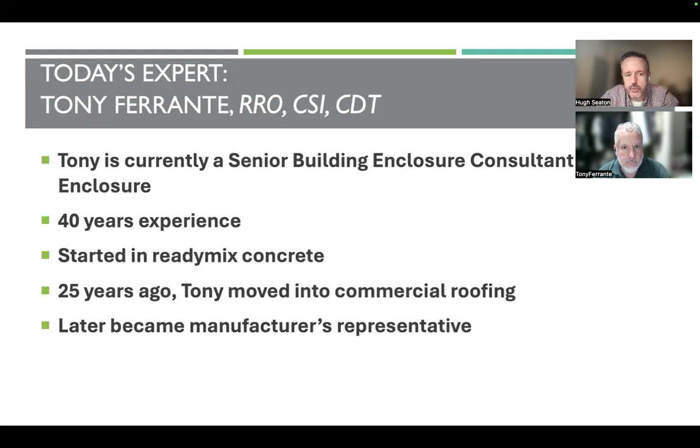So I'm going to go through just a little bit of intro. Tony's today's expert. I met him when he was presenting some of this material at the CSI national conference. He's senior building enclosure consultant at a company called BPL Enclosure. He's been at this 40 years, actually started in the concrete world. 25 years ago, he came into commercial roofing, so really understands what goes into the enclosure, and has been a manufacturer's rep and so on.

He's with BPL Enclosure, a national team of building science experts. Lots and lots of experience in providing this sort of thing, whether it's third-party peer reviews with designers, QA work with contractors and owners, looking over constructability and various other issues, but also can be the prime and architect of record when you're redoing or renovating something, when, of course, a lot of times enclosure was one of the leading reasons for it, which is kind of why we're even talking.

This is one of the dirty little secrets of construction, but it's not as well known as it should be: water damage is something like 70% of the lawsuits in construction. And over 90% of those failures occur from just 1% of the enclosure. So the point being, the details matter.

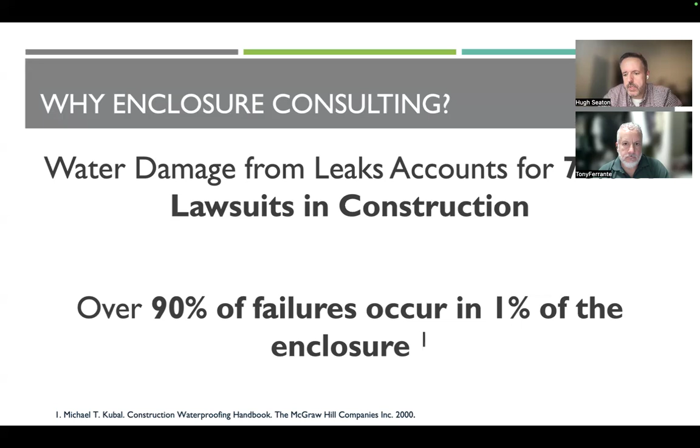As important as design and upfront work are, of course they are, the details really matter. Often, as we're going to see, sometimes that's catching something that an unrelated sub did when they were finishing something, or maybe they punctured the vapor barrier, all these other things we'll see in a minute. But the point is, it's often not something big and glaring that winds up over time really causing an issue.

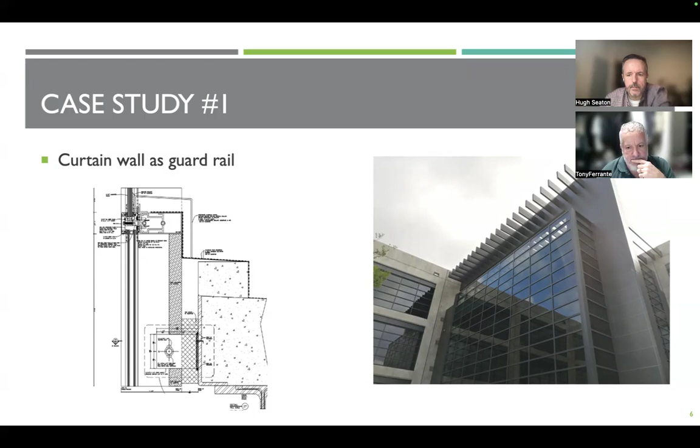On the next slide, you'll see that the original construction was watertight when it was put in - we water tested it and it worked great. But then we started getting called. We got a call from the owner that water was coming into the spaces beneath this plaza. So we went out there, and lo and behold, when we had tested it, it was when the water barrier had been installed and after it was tested and proved to be watertight.

A contractor came in and decided that the way they were going to dress this up was they threw this mismatched bronze piece of coping, for lack of a better term, on it. And they were so unprofessional - you can see where they hand snipped this thing to get it around the supports, then used clear silicone caulk that they probably bought off the shelf at Walmart to try to make that watertight. So one of the best maxims you can use in construction is: if it looks wrong, chances are it is wrong. Nobody should look at that detail and say, oh, that looks good.

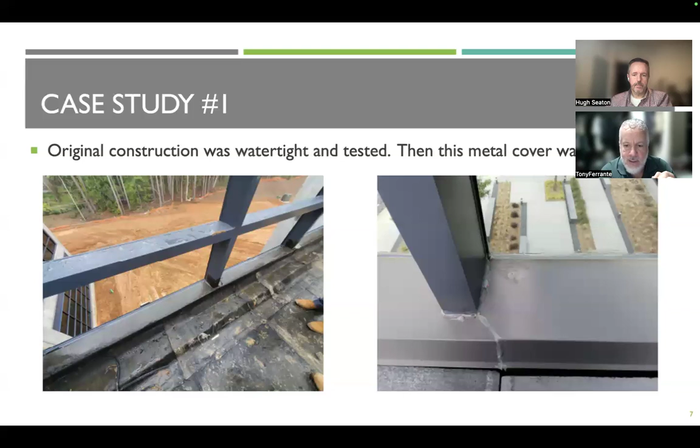So when you go to the next slide, we came in to try to figure out and do reverse engineering and forensics on it. The person who was asked to dress this up actually threw a wood nailer on top of the ledge that was totally superfluous and wasn't needed. And in installing this unneeded wood nailer, they punched holes through all the waterproofing. Then they put a T-bar into the existing waterproofing, putting holes in that as well. And then they attached that gross piece of coping on it.

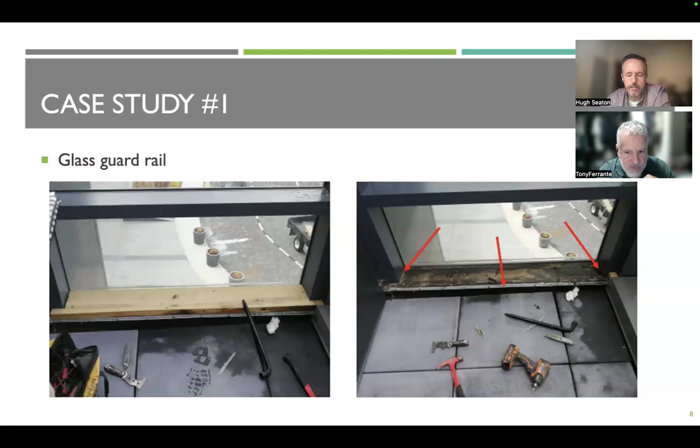So we had to have them come in - a different contractor. They removed the T-bar, they removed the wood nailer, they reinstalled a true waterproofing, water resistant layer on that. And the finished product should be on the next slide. We then covered it with more waterproofing, and the final product was a coping cap that went over that base flashing.

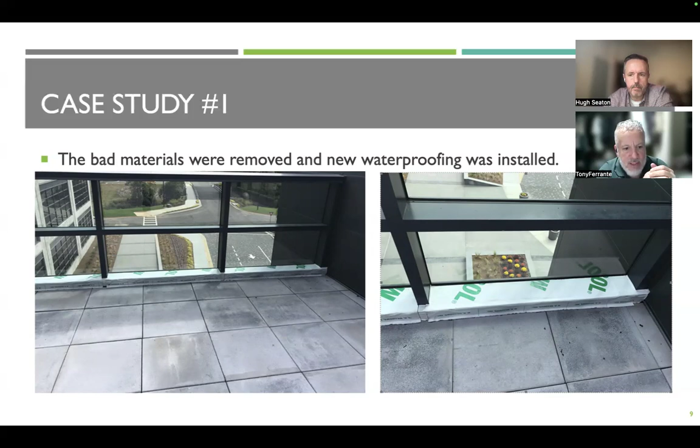And they matched it - first of all, they matched the same color of bronze. It's not hand snipped, it's not sealed with caulk, but the important thing is there were no intrusions, no penetrations through the waterproofing. It's very frustrating for the building owner because it had gotten this seal of approval that when the waterproofing was installed, it was in fact waterproof. And then a separate trade came along and totally destroyed what was there.

That's kind of the point we're trying to make today - a lot of times the original design and the original installation and build is fine. But either at the end of the job or later as things get adjusted, it's important for everyone involved, whether it's the GC or the owner, to really understand: is the subcontractor who you brought in aware of issues like this? Are they qualified when it comes to waterproofing and enclosure? And a lot of times they're not. So it's very important to have kickoff meetings, a lot of communication between the trades, people working in the same area of the building. They should have a ready flow of communication so they can understand what each other does.

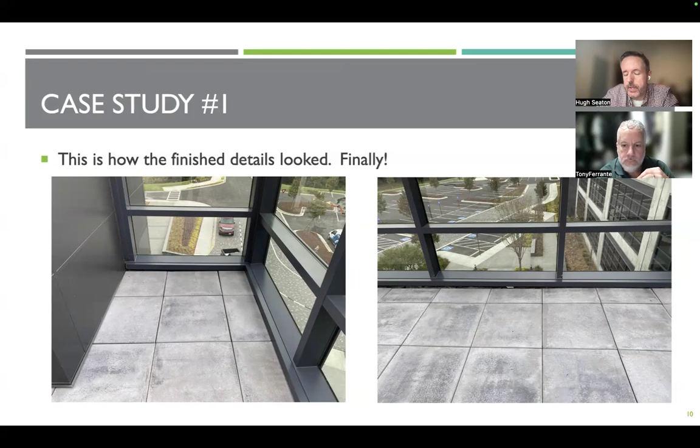Case study number two is the problem you get with exterior entrance doors. The majority of exterior entrance doors, if they're for egress, can't be made 100% watertight. Back in the first class we talked about the 4 Ds of waterproofing or rainwater management, and the number one is deflection. So it's very important if you've got exterior entrance doors that you deflect the water.

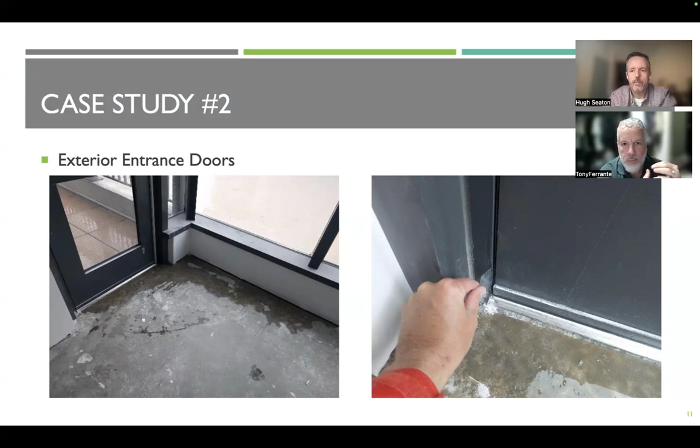You have a canopy over it, or in some way keep the water from hitting the door or pooling in front of it. On this particular building, the next slide shows the door we were looking at. There's a canopy above it, but it's so much higher above the door that it's really not providing any deflection for that door.

So they were getting wind-driven rain against that door. Water was pooling at the base of the door, and there was no way to give it a full weather seal. That's when you have to drop back and punt and say, okay, we've got a situation where they didn't want to add a lower canopy over that door. They couldn't — they were stuck with what they had.

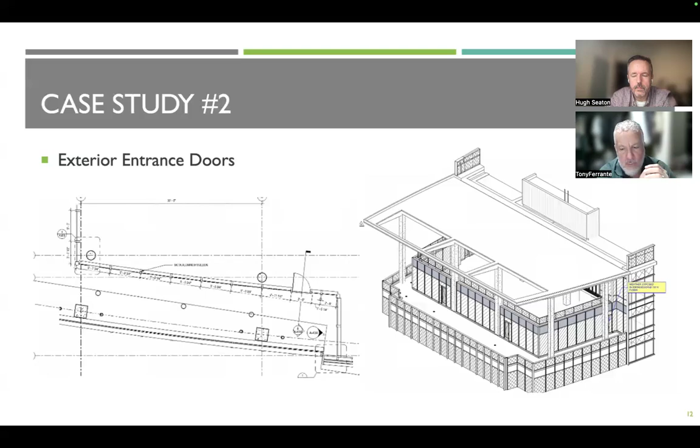The next slide shows the only acceptable remedy was the slab. There was a slab depression with a drain and a walk-off grate, so that the water that was understood to continue coming in could be handled without redefining the entire building and violating codes with an interior or exterior egress door.

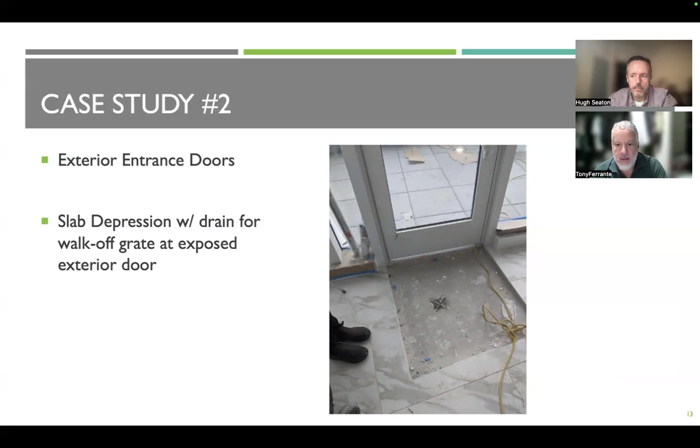That was done as a solution so that if any water came in, you no longer had slip and fall hazards. The water had a place to go, it could be managed, and you weren't running into problems with mold or flooring issues. That's how that was fixed.

This is one of my favorites — a curling ice rink facility up in Minneapolis, Minnesota. It's the largest curling rink facility in North America. Curling is that Olympic sport where they've got guys with brooms sweeping the ice as they throw that kettlebell-looking thing across the ice. They had a problem. This facility actually has Olympic curling teams from Canada, the US, and abroad come and train there.

They had water dripping from the roof deck and truss system. The managers — I mean, these guys are rink managers, they're not enclosure consultants, they're not waterproofing consultants. The only way they could figure out to keep the water from dripping from the underside of the roof deck onto their ice and patrons was to bungee cord buckets from the rafters to catch the water.

And they didn't even get matching buckets. The first time I saw this, I was like, oh my God, they could have at least gotten all white buckets so they wouldn't have stood out so much, or used the same color bungee cords. There was actually a person whose job description included going around in a cherry picker every third day to get the water out of the buckets.

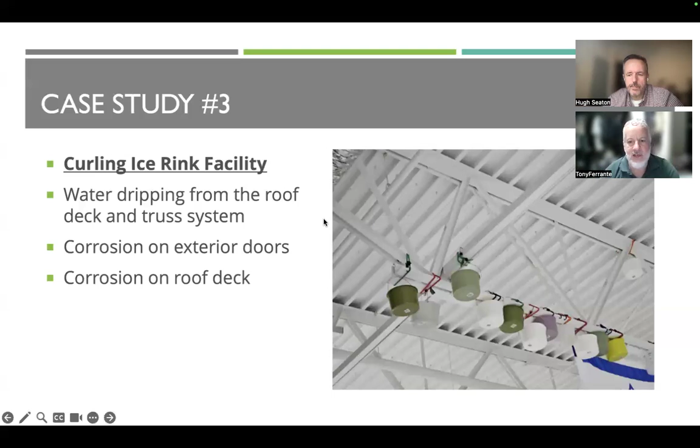So they called us in to see if we could help them figure out why they've got the corrosion on the doors, the corrosion on the roof deck, and why they were having all these condensation problems on anything that could rust. We went in, and there had been previous attempts - they put in dehumidifying units in the arena, which will lessen the humidity, and they spray foamed the wall-to-roof connection around the arena. That was a decent step, but it was like a band-aid on an open wound. It wasn't really stopping their initial problem.

We got deep, you can see that - I mean, that's a big facility. So we started with smoke tests to figure out what was happening with the air, because we knew enough about the building science that the condensation was happening because warmer, moist air from outside was being drawn into the building. Once that moist air reached a surface that was below its dew point, it condensed on that surface.

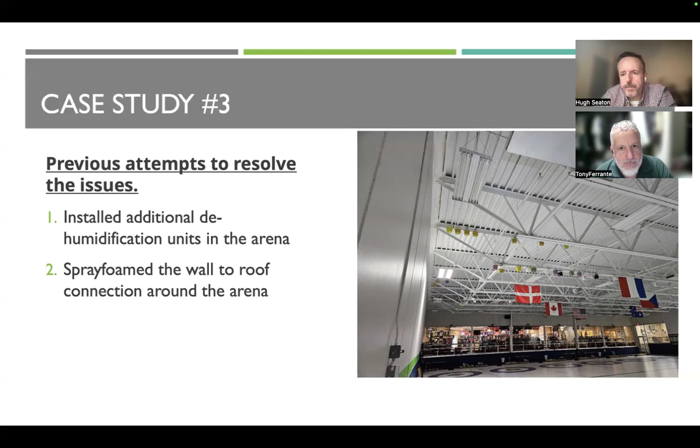Beneath the ice rink was locker rooms, and the smoke was flowing in from the outside. They had spray foamed the deck to the wall, but they still had massive air leaks - they had virtually no air barrier going on. When they spray foamed the deck to the wall in their first attempt, instead of making a big straw, they made a bunch of little straws. It's like if you've got a tire with 99 holes in it and you fix 98 of them, you still have a flat tire. If you've got an air leak issue and you fix half of them, it's just going to make the other ones flow at a greater rate.

So we were able to find out through the smoke test that it was coming in from the outside into the ice rink. It was also coming in from the outside into the locker rooms, and then proceeding into an amenities area and into the kitchen snack bar area. That started pointing us to clues as to what some of their issues were, aside from the lack of an air barrier.

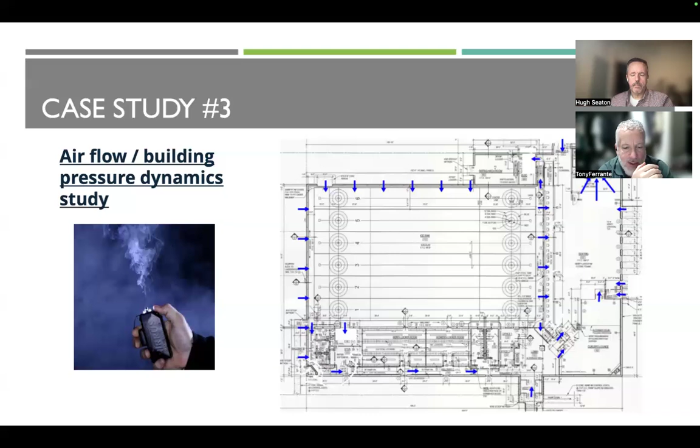We found the culprit. Kitchens have exhaust fans, and it takes a talented mechanical engineer to figure out just what the flow rate needs to be for the exhaust fans in the kitchen. They have to have exhaust fans for each flat top grill, each shortening fryer vat. Oftentimes in the restaurant industry, they will over-engineer their exhausts based on, well, if we get busier we'll put another flat top in here. So we may need X amount of exhaust being pulled out - let's go ahead and build it for 1.5 times that in case we have to add more grills or more fry vats.

So they had these exhaust fans in the kitchen that were, in essence, sucking all the air from the building through the kitchen exhausts. And when you're pulling air, it has to come from somewhere.

So we started getting with the owner. Go to the next one. Well, real quick, it's an interesting one - just to paint the picture.

When you talk about laboratories, they often want positive pressure, or negative pressure, to make sure no air escapes. What you're saying here is because these fans were presumably running all the time, or certainly during business hours whether they were needed or not, they were creating lower air pressure for the entire building - enough that at any given moment it was pulling air in that might not have made it in otherwise, or certainly not at the rate it was coming in. Is that what we're saying? It's crazy, but the entire building had slightly lower air pressure because these things were humming away the whole time. Absolutely. And there's supposed to be an inlet - when it's created effectively, they've got an inflow of air that matches the outflow, so they've got their own closed circuit. But sometimes those fans make noise, or have a bad bearing, and somebody not in the know flips a switch and turns it off. And if you cut off your inflow of air, those massive things drawing the air out have to get air from somewhere. Sometimes you can think back in your life when you've gone to a business and it was very, very difficult to open the front door - that's the interesting situation.

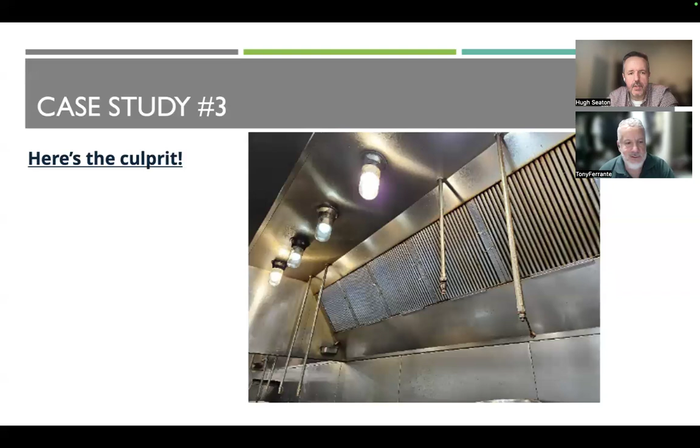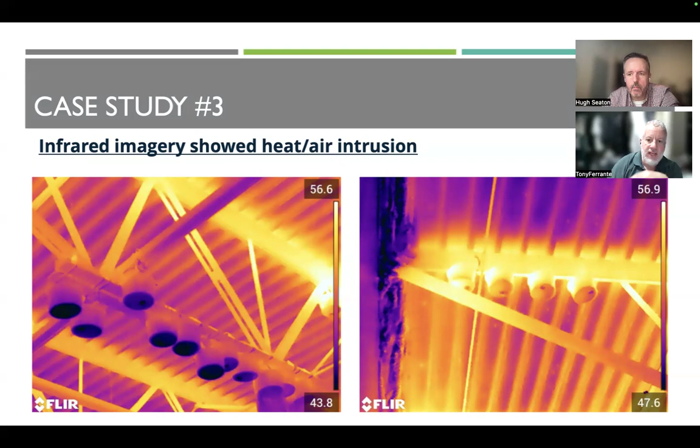And then on the next one, the building was designed with a dock door in the back, and air and heat were just flowing around that dock door. That was another massive straw letting very warm, moist air come into the building.

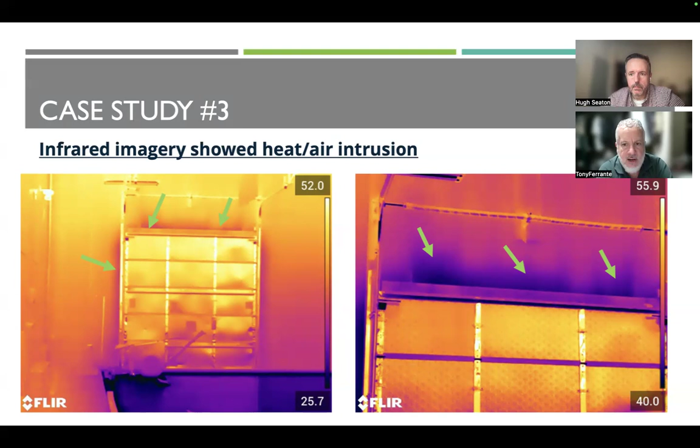They also had a foyer with an open door. In speaking with them and trying to get them to understand, instead of a door going straight from the interior space to the exterior space, we posited the possibility of adding a foyer there, so there would be a delay in the air, making it a much more airtight system by having an exterior door and then an interior door.

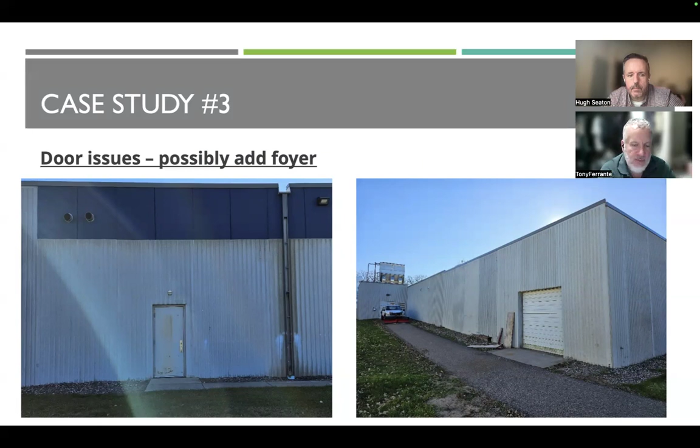So then we got the owner in touch with mechanical engineers. The mechanical systems needed to be balanced. The kitchen exhaust hood shouldn't sabotage it—it should run slightly positive in a northern climate. Ideally, the ice arena should be positive to all the surrounding areas so it wasn't drawing warmer, moist air into the ice rink. The colder, drier air from the ice rink could get pushed into the surrounding areas better.

So they worked even better at finding the details of where the air was coming in, and then repaired and replaced the HVAC and exhaust fans to get it all operating and running well. The good news is they were eventually able to retire the buckets and the bungee cords.

And when you do this sort of thing, I'm assuming you very often find people are surprised by where the air is coming in from, right? I mean, a door and the big truck door probably wasn't a huge surprise, but some of the other areas, it sounds like, were.

Absolutely, absolutely. And it runs back to the fact that in the actual initial construction, had they been paying attention to the air barrier, this could have all been handled in the design phase. But when this building was being designed, or when many buildings are being designed, they're not even thinking about the need for an air barrier. That's why getting with professionals—enclosure professionals who are cued into this and have an eye for it—is really important, because it definitely affects the performance.

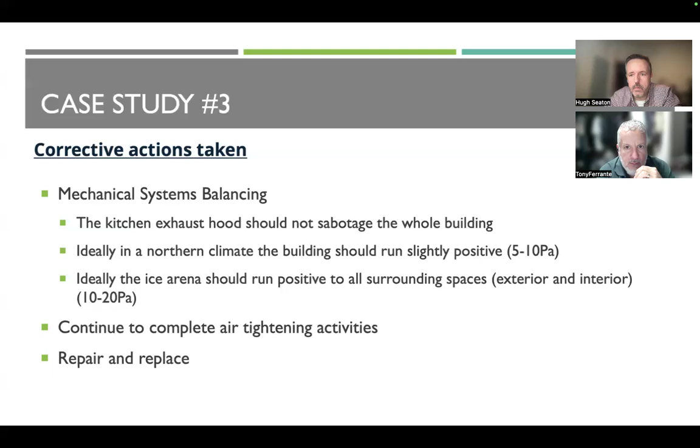It's one of those things where it's a whole lot easier to head off the problems before they become problems than it is to try to fix them after the fact. If for no other reason, you save on buying buckets, and the cost of the guy going around and dumping them out.

So this one is a multifamily situation where you've got shingles buckling up on the roof, and everyone's first thought when they look at this, or most people's first thought is, well, the roofer did a bad job—it's a bad product, that's the roofer's fault.

Well, it's not really the roofer's fault, because this building happened to be a wood structure that has CMU stairwells. The wood shrinks and expands based on its moisture content—there's an equilibrium for wood—and if you're not planning for it, really bad things can happen.

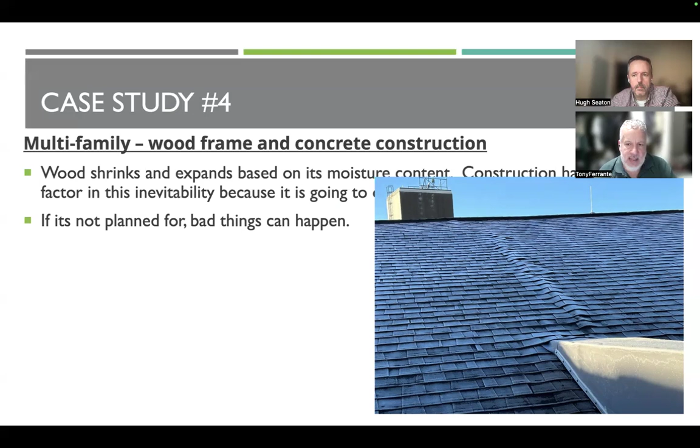So we started digging into what was happening, and you had the wood framing butted up into the concrete stairwells. There was a break between the wood beyond the concrete stairwells and the tornado-sheltered concrete stairwell. When the wood beyond the stairwell started shrinking, the roof deck actually shrunk, and they had already roofed it with shingles. So the shingles are buckling because the deck couldn't shrink in the area of the concrete stairwell the same way it did beyond that. That's why there's that ridge of shrinkage.

So that's another thing—it's an insidious little thing that's in the back of the mind, but until you actually see it in practice, it's just a theoretical thing. Yeah, wood expands when it gets wet and shrinks when it dries.

But when you start seeing what the effects are of mixing your structure types and not accommodating for that, it can really impact the performance of the building over time.

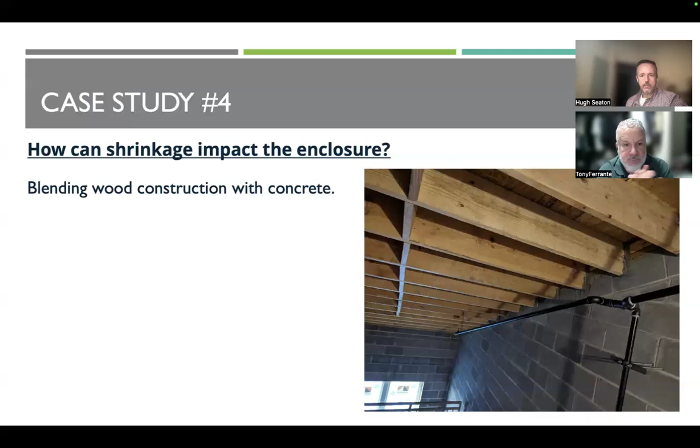So the next one talks a little bit about how trusses can deform. The way it is, with the top being exposed to the elements, the sun, the heat, and the cold, and the inside that's protected, the bottom chord shrinks and the top chords lengthen, and you end up with a bow in your truss.

It's something that's important to be aware of, especially when you're designing the building and mixing the building materials, because it's going to happen. Wood is always much more susceptible to the elements than some other building materials.

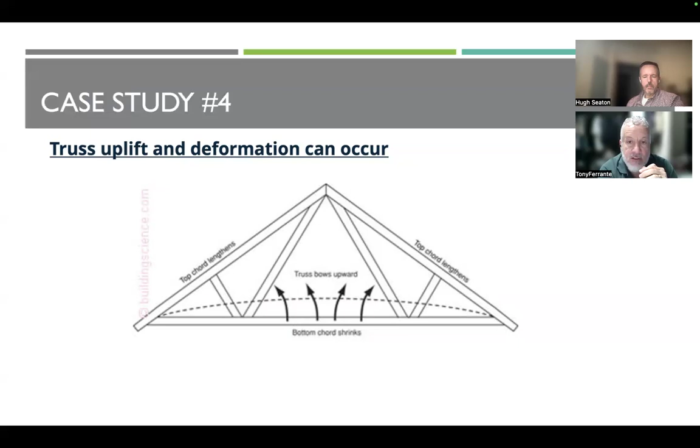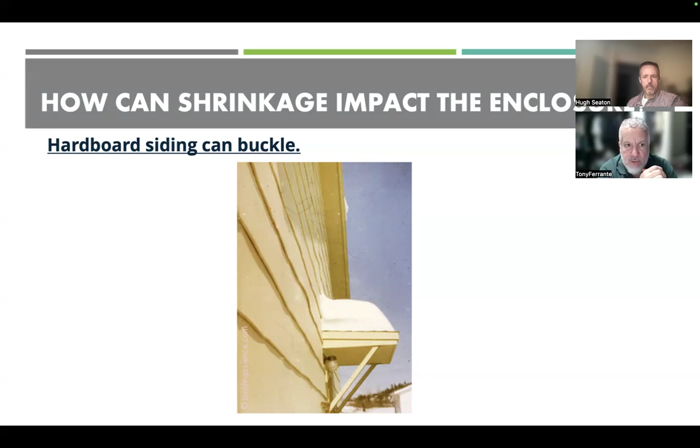The next one shows that you have shrinkage between floors. So when you've got a wood frame building, your different floor levels are going to shrink. And if your cladding to the structure doesn't accommodate and anticipate the shrinkage, you can end up with metal wall panels, eaves, masonry, windows and doors, all these different things having problems because the interior structure is moving and the cladding didn't accommodate for that. You can get into some serious issues when you don't anticipate the shrinkage and what it can do to the enclosure.

And what do you typically do about that, other than not use wood? Well, it looks like here you're giving yourself the equivalent of what you'd see on a bridge or railroad tracks, where there's a gap that allows for expansion and contraction.

It sounds like you're doing the same thing, but earlier, where you had wood inside of concrete essentially, it's hard to do that, right? Because if it's a structural member, you can't really have a gap. So is the argument that you shouldn't have it inside of the CMU, that it should ride on top of it instead? What are the solutions?

The deck can free float. There are also many different expansion joint assemblies for claddings, for the walls, between the floors, and for the roofing.

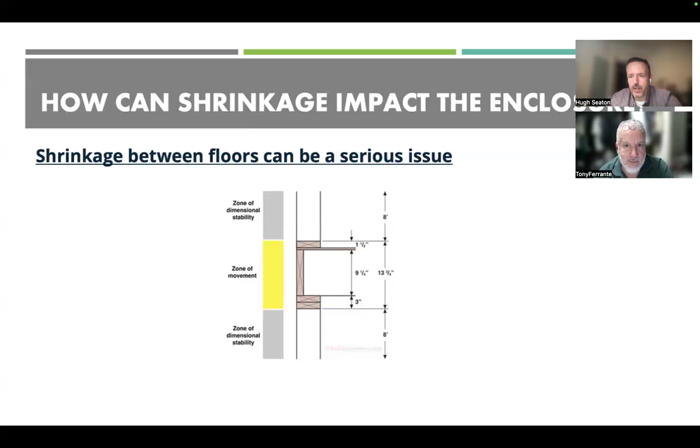So we dug deeper into it. All concrete has micro fissures. Concrete is going to crack, and the capillary action of water going into those fissures is the main reason why you need to have under-slab vapor barriers.

Below grade waterproofing, because oftentimes the blind mental thought is, well, my concrete swimming pool doesn't leak. Well, it doesn't because it's waterproofed.

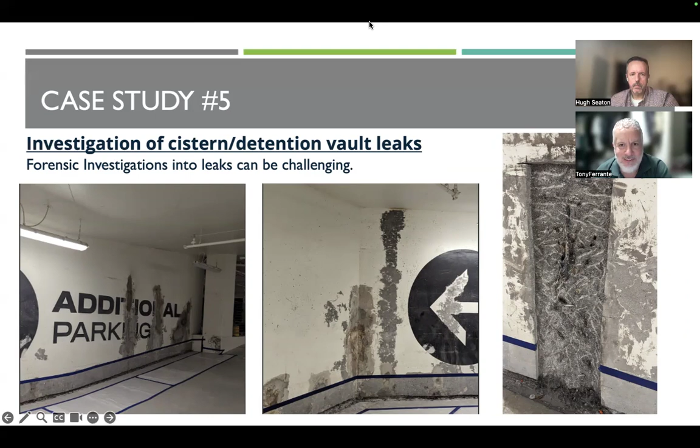So we had to go into the cistern. Go ahead and go to the next one. We actually put waterproofing on the interior of the cistern to seal that off, because it hadn't been done correctly. So, in essence, we turned the cistern back into a watertight container so that it wouldn't leak through the walls out into the parking deck.

And the point of a cistern is that it's containing water or fluid. Correct. So had they just originally installed it wrong, or over time did it fail? The original installation was not adequate for what it was supposed to have been. Interesting. And what's the takeaway for someone that doesn't do that for a living?

Is it to keep an eye on how it's being tested, or just make sure someone who knows better looks at the methods they're using? I don't know if inspected is the right word, but are they using the right materials, the right application? It's always better to have a second pair of eyes.

That's where CA functions is such an important thing, along with the third party peer review during the design process. You can figure out if the materials are compatible with each other, if they're going to actually perform the way you're hoping. Then CA, the second set of eyes, makes sure the contractor who's supposed to be doing it is actually doing it in the fashion they're supposed to. Got it.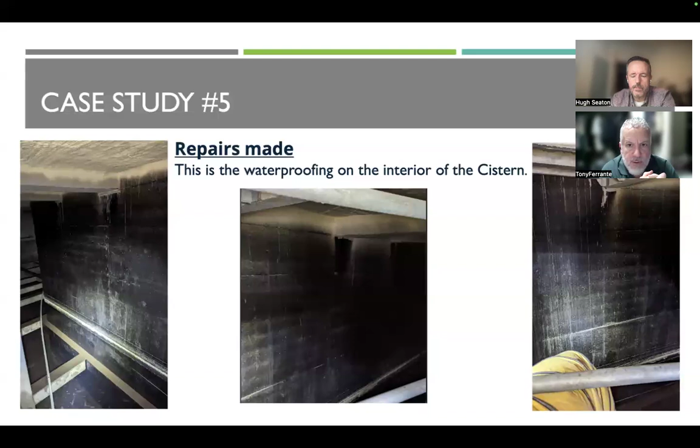This is one of my favorites. This is a rooftop terrace over a hotel in Augusta, Georgia. It was great, they were loving it. It was really cool. If you've ever been to Augusta, Georgia, the sun can beat down on you and it can be somewhat warm. So someone came in and gave them a bid to put a pergola over the terrace so people could sit in the shade.

What they did was drill down into the existing rooftop terrace so they could structurally bolt those columns into the decking. In doing so, they opened up the waterproofing at each one of those locations. The terrace was totally waterproof, and then they decided to put up this pergola, and the guy who came in just destroyed the waterproofing. When you put holes through the waterproofing, it's not waterproof anymore.

So every one of the hotel guests on the top floor was getting intense amounts of water in there. We opened up the ceiling and you could see rust on the bolts used to bolt down those columns, where the water was dripping in and destroying the drywall ceiling of that hotel room. The water was living in the drywall. It had that nasty musty hotel odor of mold. It was bad. Some of the rooms were unoccupiable.

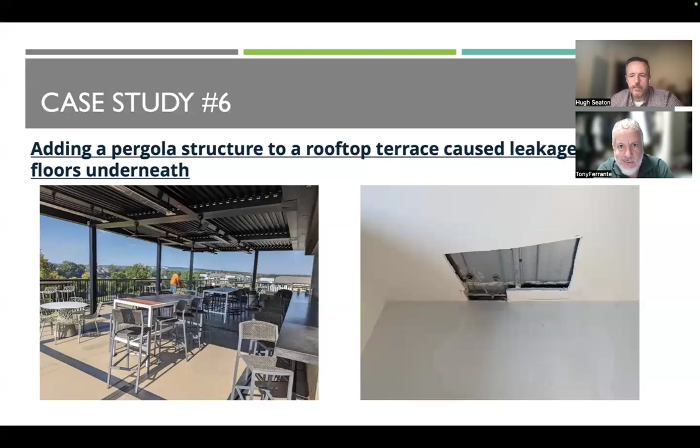And when you're talking about a hotel, that's their profits. So we went in, cored down around that, and saw the waterproofing mat. Without removing the columns, we were able to core down into the deck to the waterproofing mat. You can see the little dimples on the waterproofing mat down through that picture of the core.

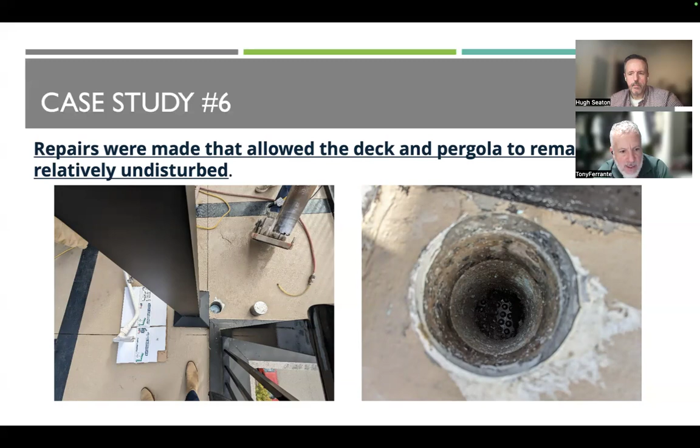A low viscosity acrylic resin, literally the same viscosity as water, was poured into the cores next to each one of those so that it ran along the drainage mat. When it cured, it reinstituted the waterproof capabilities of the waterproofing membrane. From underneath, there were drain tubes for the excess to come out. The rusted out bolts and nuts were replaced, the waterproofing was put in, and once all the holes through the drainage mat were repaired, they no longer had any leaking problems.

There's something cool in what you just said, you guys used a sealant that was about the same viscosity as water to just follow where the water went. Exactly. That's interesting, like let's just have it do what water does and then solidify, and you've covered most or all of it. Really interesting. It's a product that the chemical engineers who came up with it, I hope they're financially compensated quite well for it, because it's a very useful invention.

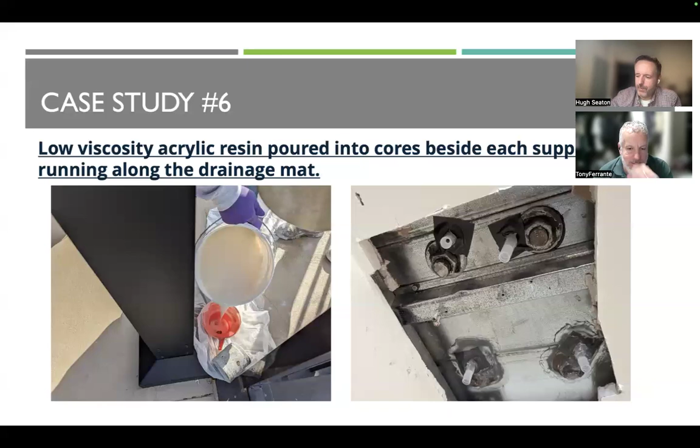Because it follows the path of the water, and then when it's in there, it hardens and prevents any more water from following behind it. Very cool, especially because water gets everywhere. So having something that can follow all those little places it might go is a really neat way of solving the problem. Water is the best detective, it's going to find the path of least resistance, water is going to find a way. So this was a cool case study.

These windows were thought to be leaking. Once the windows were installed, they got water around the windows. They called the first window guy. He came out and threw down sealant. That didn't fix it. So they called somebody else. He came and put more sealant on. Used to call it the sedimentary rock of sealants.

You can go out to job sites that have chronic leaks and just see the layers of different sealants, different colors, different aging. Anytime it looks wrong, chances are it is. If you've got a building with sedimentary layers of sealants, they're not fixing the problem. The problem is something other than where they're putting those sealants. If the place receiving sealant is actually the problem, the first layer of sealant should have fixed it. So that's always a clue that you might want to look deeper into it.

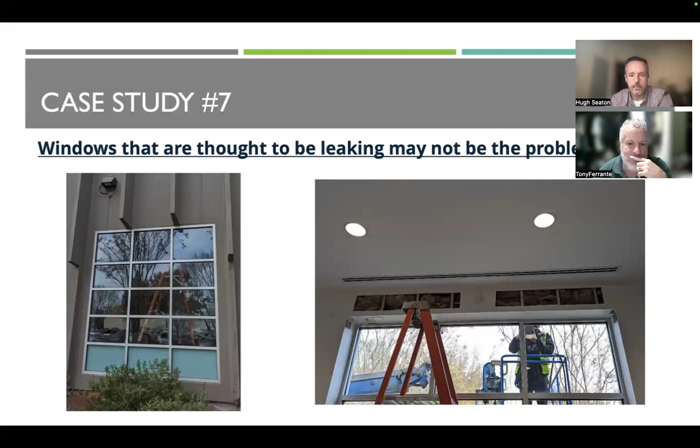So when we went into the wall and started our spray testing, we proved that the water that had been manifesting itself as a quote unquote window leak was actually coming in through that exterior light that had gotten punched through the sides of those concrete panels. The water was coming in there, running down the wall, hitting the top of the window, spreading around the window, and making itself look like a window leak when in fact it was the people who put that light in.

But I'm seeing at least one pattern here, and that is after something has been put in properly, somebody later, whether during the original build or very often later, is punching through these holes. As you think about where you guys get pulled in and where you're solving problems, it sounds like that's by far the most prevalent thing: designs are usually okay, and the original build is often okay, but it's when somebody comes in later and punches a hole in it that you often find problems. Do you find that's the main way you've got issues, or am I overgeneralizing?

I'd probably say it's 60-40. 60% of the time is after the building has been commissioned, they've received their certificate of occupancy, and then somewhere down the road somebody decides they want to add more exterior lighting or add a pergola. That's probably 60% of it. 40% is like the ice rink that was just poorly designed and they ignored the air barrier from the get-go.

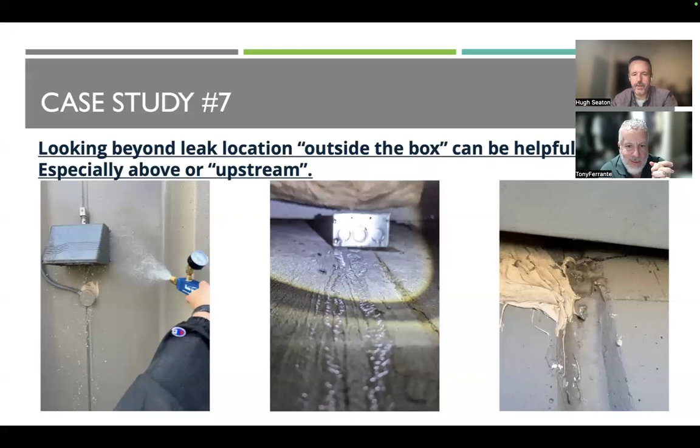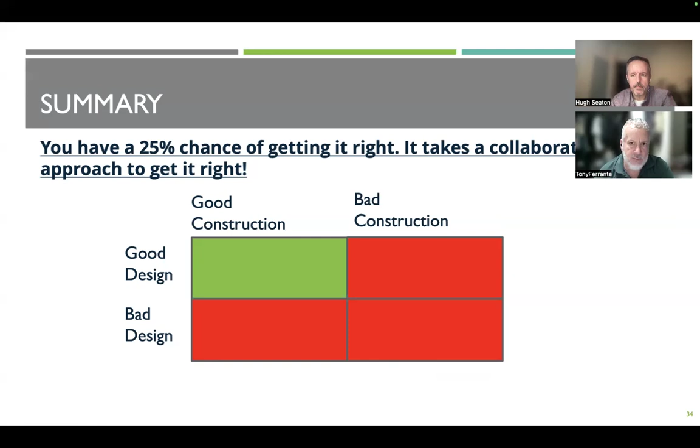Love it, awesome. Well Tony, thank you. I really love this kind of thing. I love digging in and giving people some examples they might not have heard of.

What's funny also about some of the examples you gave: everyone has seen a roof that buckled. Lots of people have been in ice rinks that have dripping problems because everyone thinks of them as a barn -- probably why they didn't think about the air barrier so much, thinking this place is so big, air's going to get in no matter what I do. So really interesting to have you dive in like this.